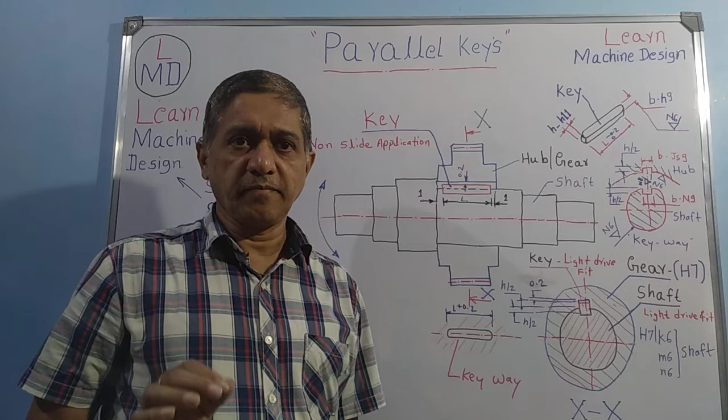Now let us discuss parallel keys. Parallel keys look like this, parallel in width and parallel in height.

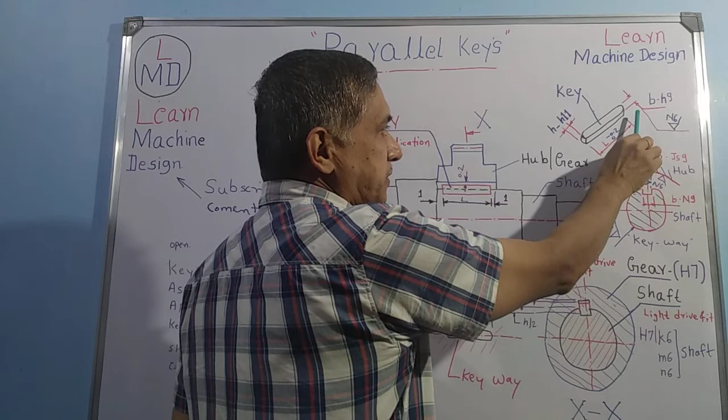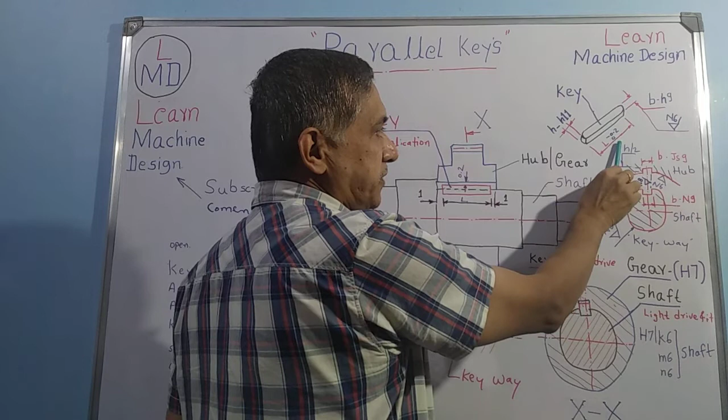Normally parallel keys are made round on both sides. Accuracy wise, the width accuracy is h9, height wise it is h11, length wise it is minus 0.2 millimeter, and surface finish width wise is N6 accuracy, overall it is N8 accuracy.

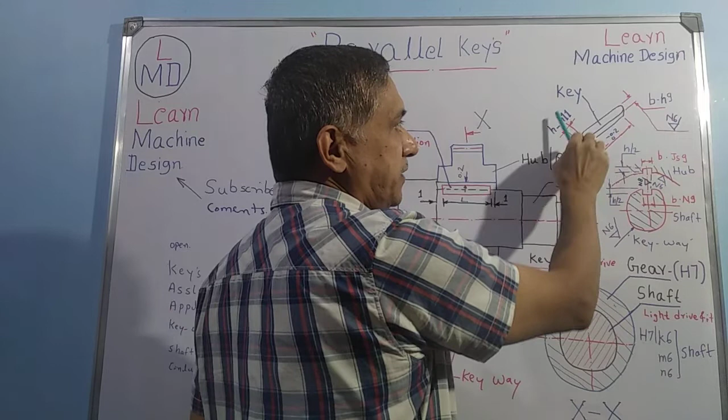This key is used in machine tool industry or any machine for driving the hub, also called gear. In this assembly there are three parts: one is the shaft, another is the hub. The function of this key is to drive the hub.

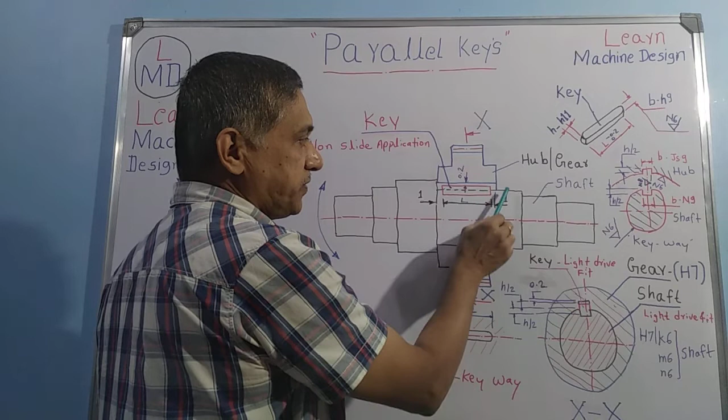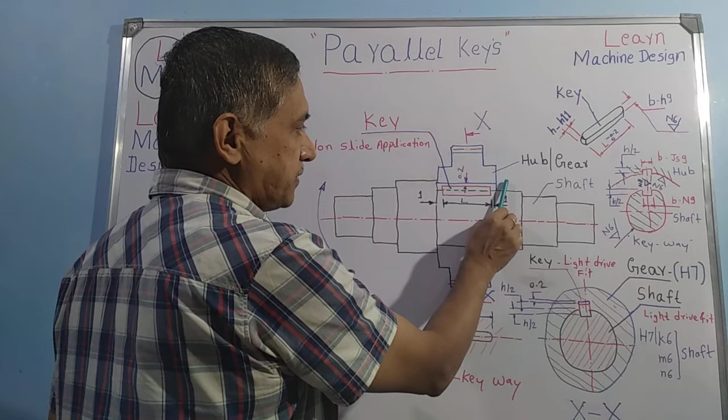Look at this assembly here. This red line shows the key and this shows the hub. The key length is purposely made minus 1 millimeter, which is required for assembly purpose and for safety of the function.

This kind of key function is called non-slide application. In this case, the application of this assembly is only to drive the hub, no sliding motion, only rotating motion. That is why this type of key is called non-slide application of keys.

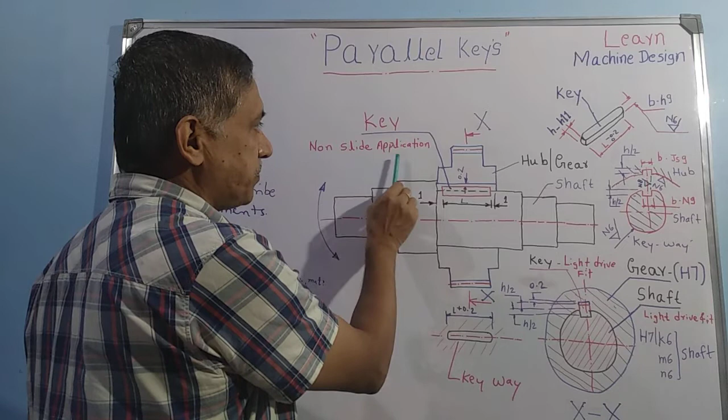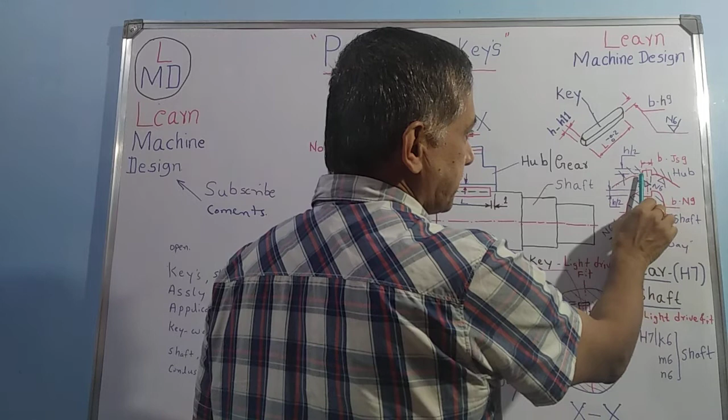As for the keyway, this key is fixed in the groove like this. In the shaft, the groove is made like this, and in the hub also it is made like this. The groove width is equal to the width of the key. Here the shaft width B and the hub width B should be the same.

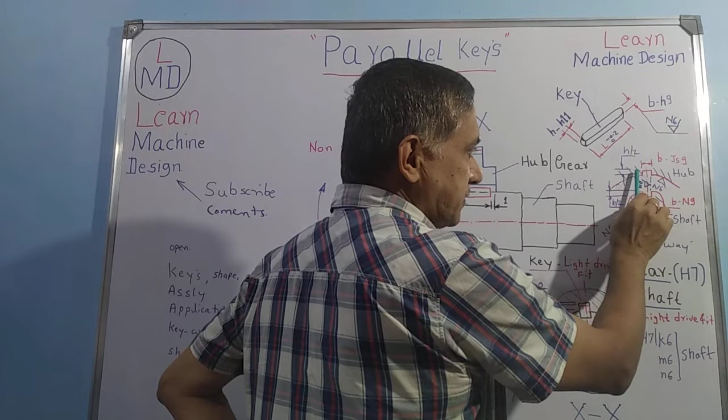From the accuracy and fit point of view, the key, hub and shaft should have a light drive fit. In the shaft it is N9 accuracy, in the hub it is JS9 accuracy.

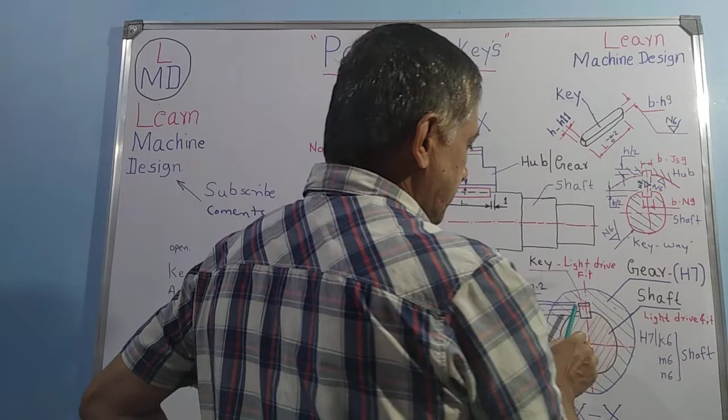Regarding the height, between the key and the keyway in the hub there should be some clearance. It is normally 0.2 millimeter, and this is required for assembly purpose and should be maintained.

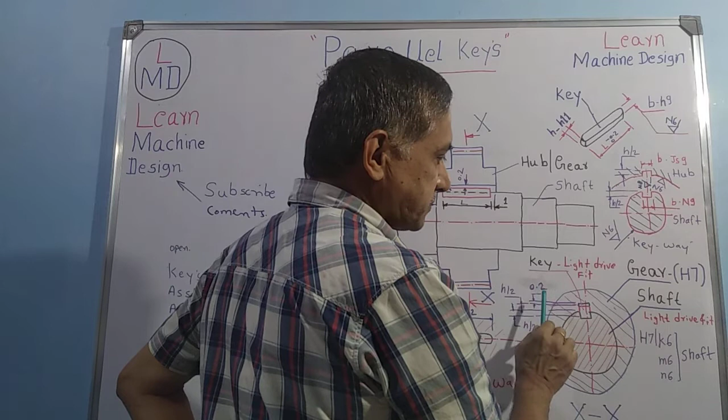Regarding keyway depth, we have to maintain 50% in the shaft and 50% in the hub. That means depth of the keyway should be h by 2 in the shaft, and height of the keyway divided by 2 in the hub.

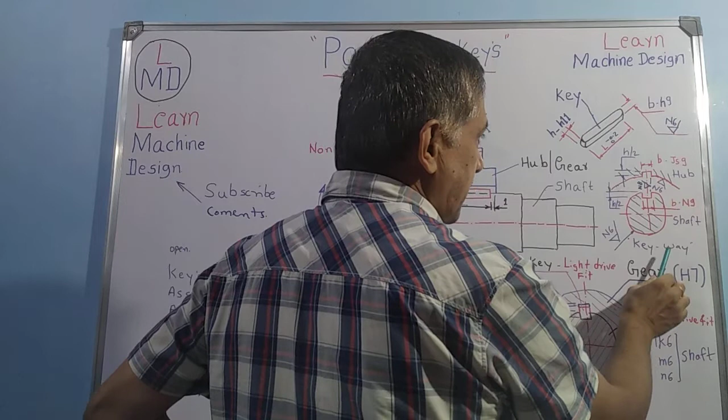Regarding this keyway, surface finish should be N8. Regarding shaft diameter, the surface finish should be N6. Hub or gear bore should be N6 surface finish. This is regarding the keyway point of view.

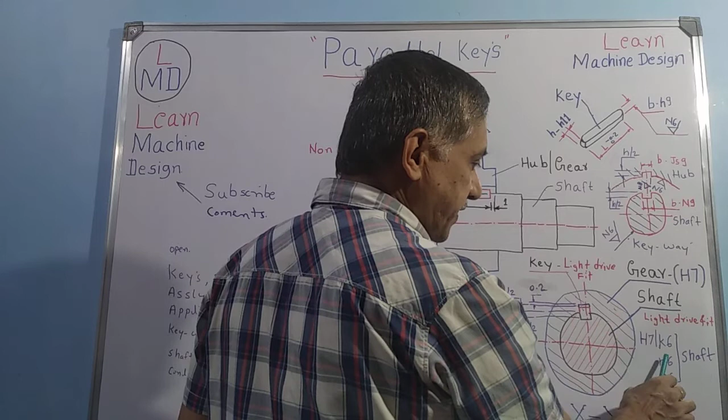Considering the shaft and hub fitment point of view, it should again be a light drive fit only. And regarding accuracy, in the hub it should be H7, in the shaft it should be K6, or M6, or N6.

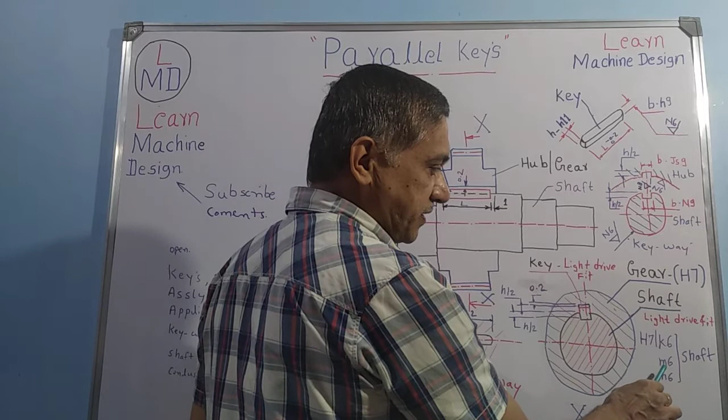K6 is the normal case, but if extra load is there, in some special cases you can use M6 also. For very heavy fit we have to go for N6 fit. This is regarding the shaft and hub fitment point of view.

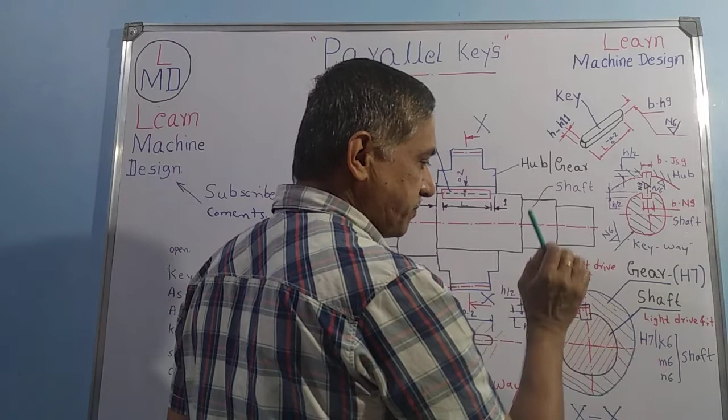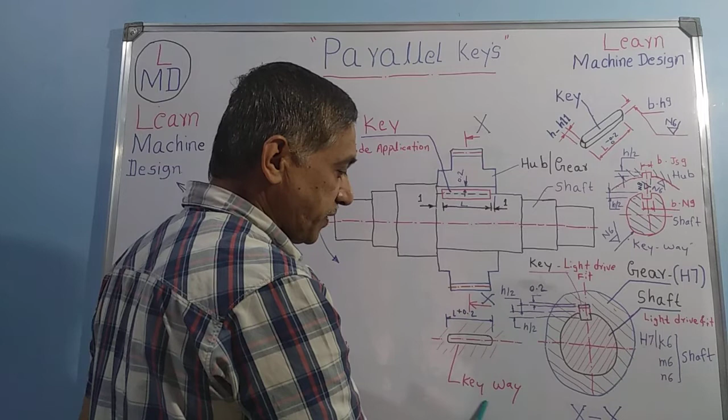Regarding one more point, in this case the keyway is made round on both sides, and this is for the manufacturing of the keyways. Normally this keyway is produced on a milling machine using an end mill cutter. If you produce it with an end mill cutter, you will get only a round shape of keyways.

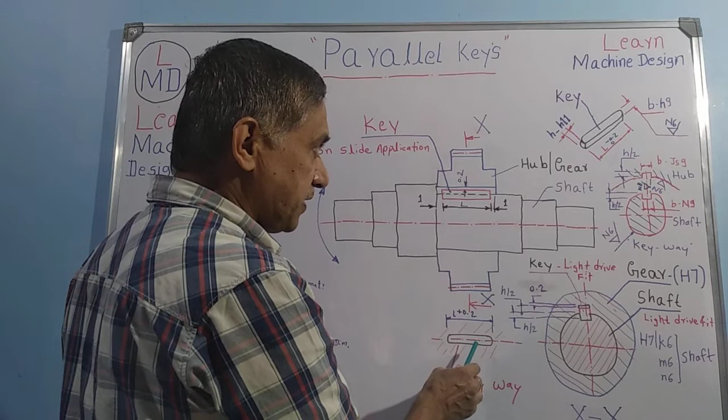Accuracy of this keyway length should normally be made plus 0.2. This is regarding assembly of key to keyway.

In this session, I have covered so far what is a key, shape of the key, accuracy, finish and material. And the material of the key is very important.

Normally we recommend the key material should be the same as recommended for the shaft. From an assembly point of view, this assembly is the most common assembly in machine tools or any machines. As for special assemblies, I am going to give hints in the next sessions.

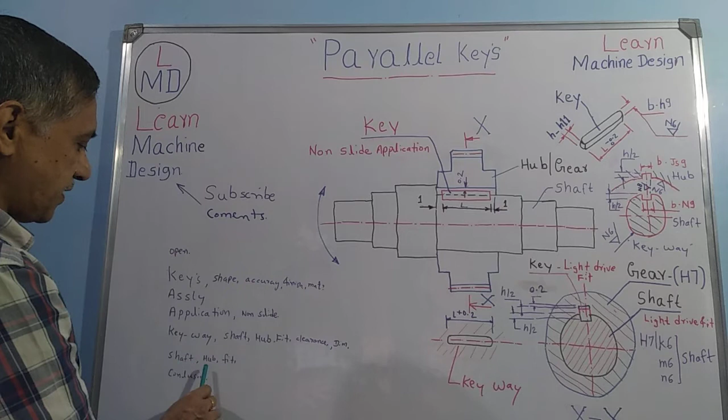Keyway, shaft, hub, fit, clearance, dimension I have covered now. Shaft, hub, fit - this is one of the important usages of keyways. In keyways, there are many types of keyways and keys. I am going to give detailed information on other keys in the next sessions.